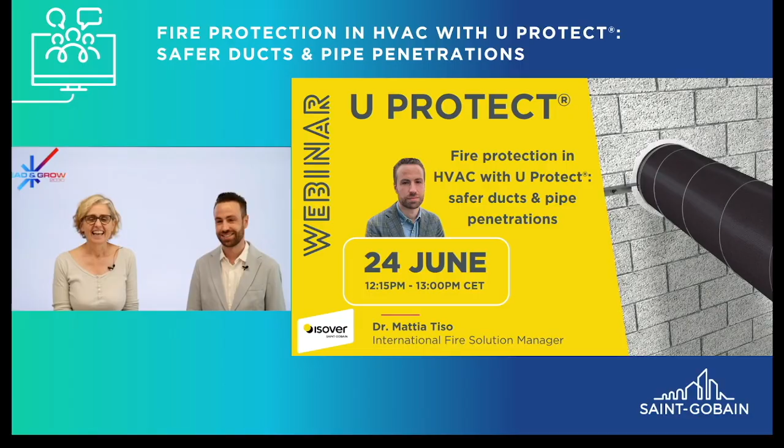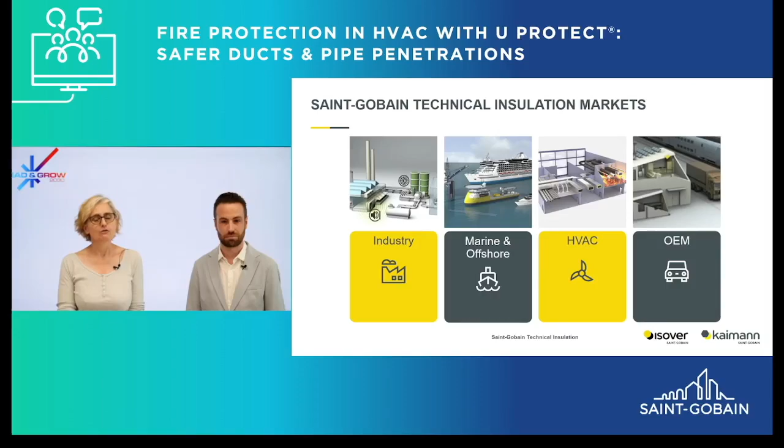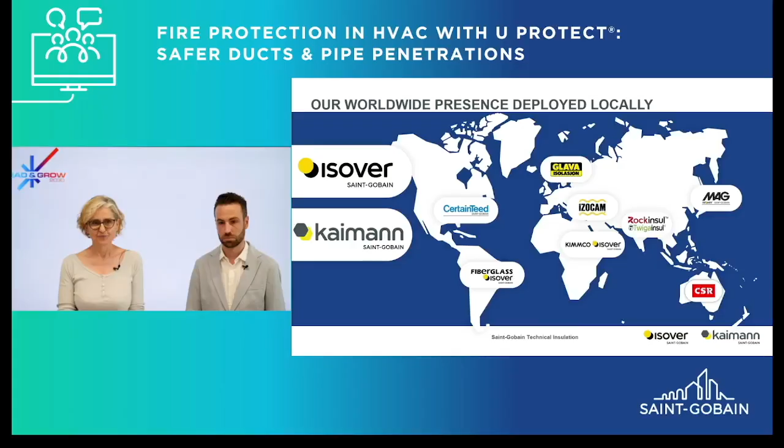But before we start, I would like to introduce Saint-Gobain Technical Insulation. We operate across 4 key technical markets: industry, marine and offshore, HVAC, and OEM. We have a strong presence worldwide with our 2 international brands, Isover and Kaimann, and we also have a lot of strong local brands, local teams and production sites in many regions over the world. We are experts in the area of insulation material, and we cover a lot of different types of material: glass wool, stone wool, Ultimate, our lightweight stone wool, and also elastomeric foams. So it allows us to address diverse and very demanding applications.

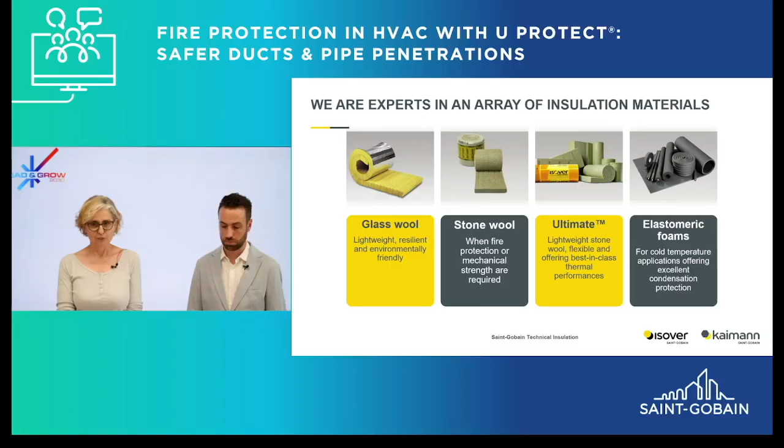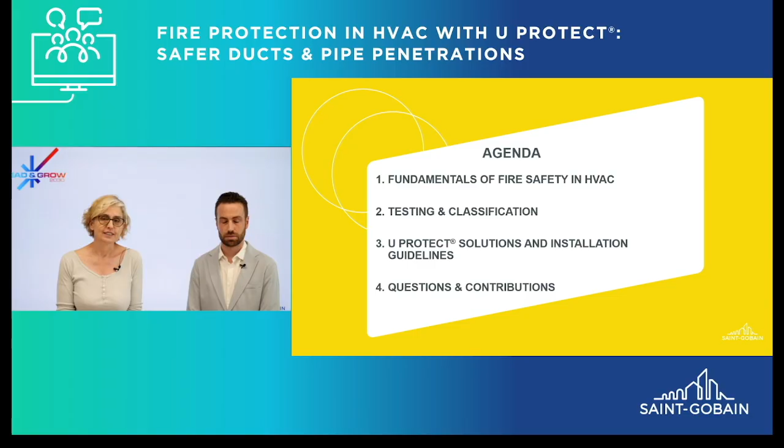So let's move to the topic of the day. This is the agenda. We will conduct this webinar in 4 parts. We will first start with the fundamentals of fire safety in HVAC. Then we will look at testing and classification. And after that, we will reveal our U Protect solutions and also the installation guidelines that we provide. And at the end, we will be happy to get your questions and take time to answer them.

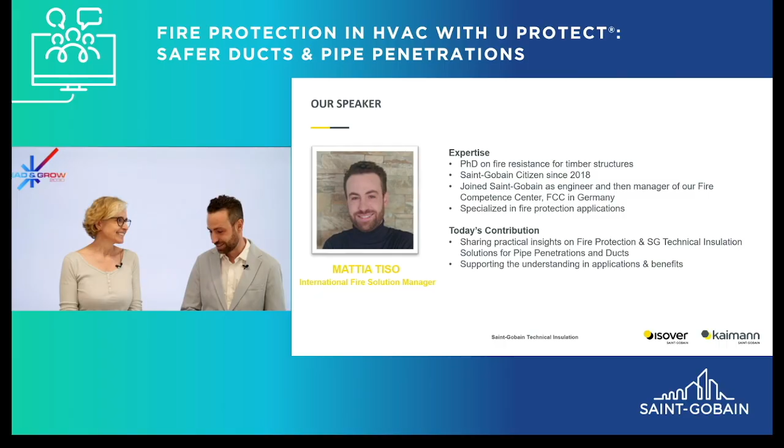So I would start with a kind of generic or simple question, at least. When we think about fire safety in buildings, we would often think about walls, doors, evacuation routes. So why do we also need to focus and talk about HVAC ducts and pipes?

You are correct. For fire safety purposes, buildings are divided into compartments by fire-rated walls and floors. Whenever we have pipes or ducts running through these fire-rated divisions, they create a perfect path for fire and smoke. This is why fire-rated ducts and pipes are needed. For that purpose, the insulation not only provides thermal and acoustic performance, but also minimizes the risk of fire spreading while maintaining the integrity of the walls, the floors, and all these systems together.

Okay, so in fact, these ducts and pipes can become a path for fire from one room to another. And then, of course, it's super important to focus on them. All right, so can you describe how fire resistance is evaluated on a ventilation duct?

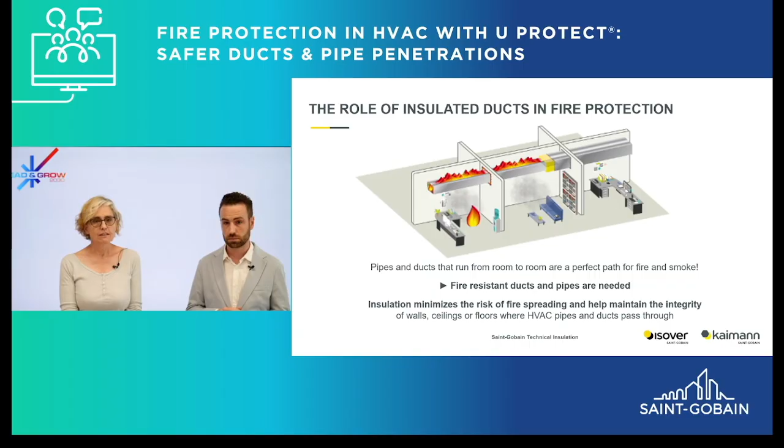Of course. Fire resistance of ventilation ducts is tested according to the European standard EN 1366 Part 1. And there are 4 possible testing scenarios. The more obvious one is that the duct can be tested either in horizontal or vertical position. Then there are 2 different fire scenarios.

The first one is when the fire is only outside of the duct, with the duct under pressure. This is also called the type A scenario. The second one is where we have an aperture into the duct. The duct is subjected to a constant airflow extraction, and this is also called the type B scenario. All right, so we need to test based on the standard, and we need to follow the different scenarios that you just explained.

All right, and how do you evaluate the fire performance? Is there any criteria for that? Yes, of course. In the same standard, the performance requirements are identified, which are insulation—meaning the temperature on the unexposed side of the duct shall not rise above 140 Celsius, and this is typically achieved with the right insulation product—and also integrity, meaning there is no passage of smoke or fire on the unexposed side of the duct, which is achieved with the right metal duct. So for ventilation ducts, we understand that the final performance depends on both the duct and the insulation.

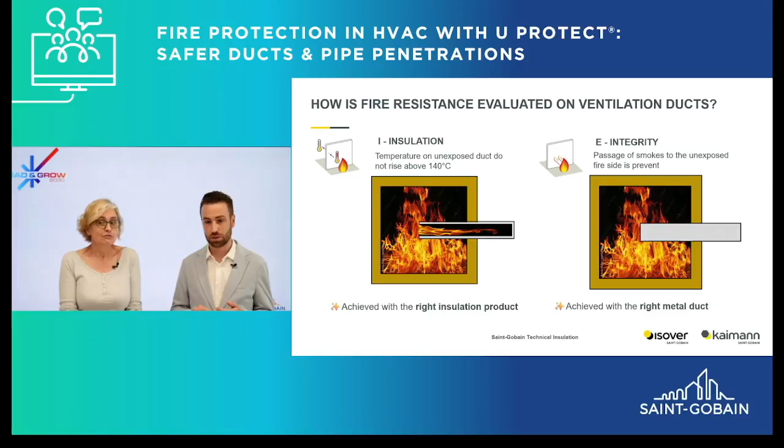Yes, exactly right. So let's move to another specific case: smoke extraction ducts. Is there any difference in terms of this smoke extraction duct? Well, yes, of course. There are also different solutions, and they are tested with a different standard. It's also part of the EN 1366 family, but it's Part 8, multi-compartment smoke extraction duct.

In this test, we combine the condition of a type A test, where the duct is under pressure, and the type B test, where there is an aperture and an airflow. So this is called the type C test, and it is indeed a very tough test.

The test can be performed with three different pressure levels, either in cold or in fire conditions. Why? Because the performance for this type of construction is about the cross-section.

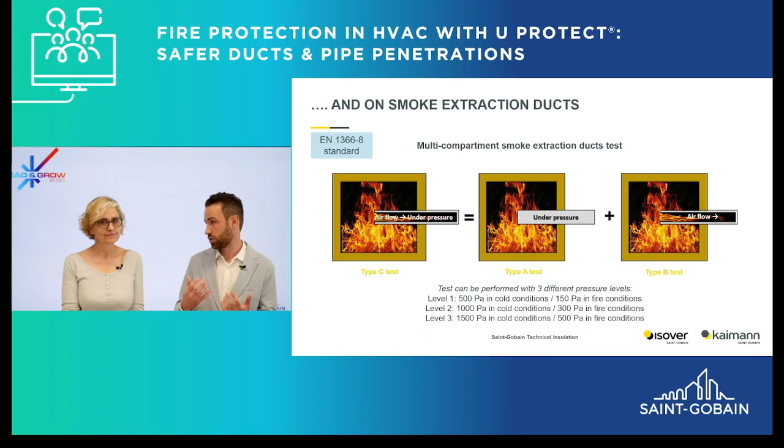For this type of solution, we need to ensure that the cross-section is not deforming, to allow the smoke to evacuate. The performance criteria is that the average cross-section shall not decrease by more than 10%.

This is achieved with the right metal duct. So if the duct deforms too much, basically the smoke extraction becomes less effective. Exactly, that's the point.

Once the tests are done, the results are translated into classification. I must say that the classification can look a little bit difficult to understand at first. So can you help us decode them? Let's try to understand it together.

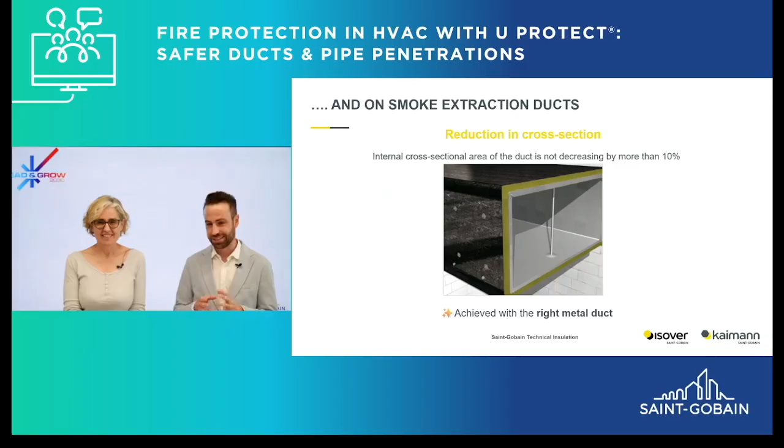So in the case of a ventilation duct, it's indicated if the integrity is fulfilled with an E. With I, it means that the insulation performance has been fulfilled.

Then there is information regarding the tested duct orientation. ho means it has been tested only horizontal, ve only vertical, and ho ve in both cases.

Then there is an indication about the fire scenario which has been tested. I to O means that the duct has been tested only for fire outside, so type A.

O to I means that the duct has been tested only for fire inside, so type B. And when we have I to O with a double arrow, it means that both scenarios have been tested.

Then there is an indication for a fire class expressed in minutes, which goes from 30 to 120. And an S indicates that the smoke leakage criteria has been fulfilled.

And for smoke extraction ducts, does it include any additional information? Yes, of course. For smoke extraction duct, the classification can look as follows.

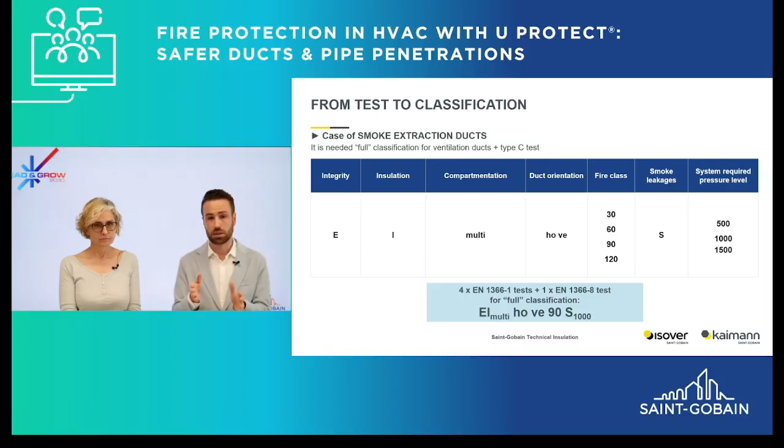And then at the end, there is an indication of which pressure level the system has been tested: 500 for level 1, 1000 for level 2, and 1500 for level 3.

For a full classification, as we show there, four tests according to part 1 for ventilation duct are needed to be fulfilled, plus the type C test on part 8.

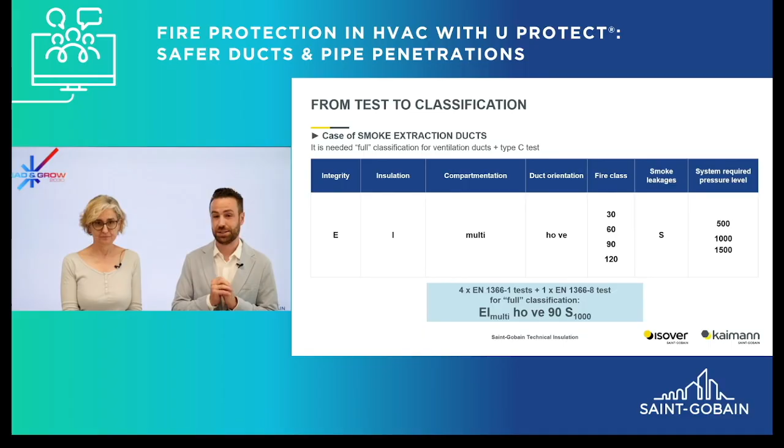Which is again part of the 1366 family, but this is the part 3 standard.

In that case, the standard allows testing a pipe in a different configuration. The most obvious is that the pipe can be tested in horizontal or vertical position. And then there are different types of fire scenarios.

So we can divide them into closed systems. The closed system is where we have, for example, the pipe capped on both sides, fire and unexposed sides, or also fire side but not unexposed side.

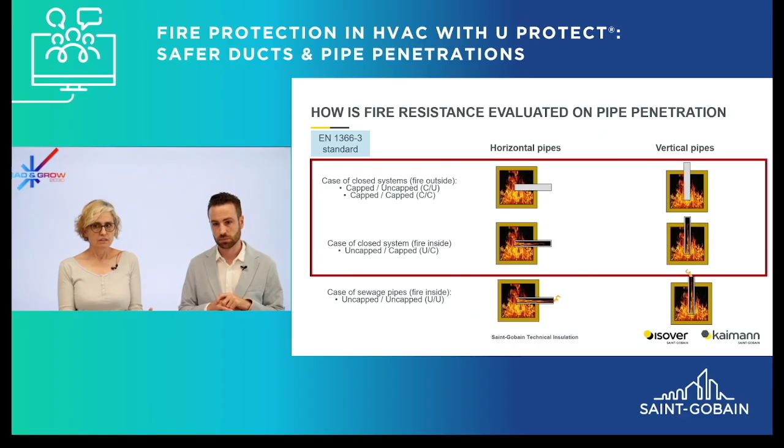And how do you test them, in fact, in real world, real life, I would say? It depends on what the end use case and the pipe material are.

For example, if we have a steel pipe for drinking water, we can test the pipe capped-capped, uncapped-uncapped, or uncapped-capped, so fire inside or fire outside, closed or open scenario. Multiple options. But for plastic small tubes in a closed system, only capped-capped or uncapped-capped are allowed. These are suggestions from the European standard, but any national prescription prevails over it. So we need to consider both the pipe material and the end use before choosing the right test scenario.

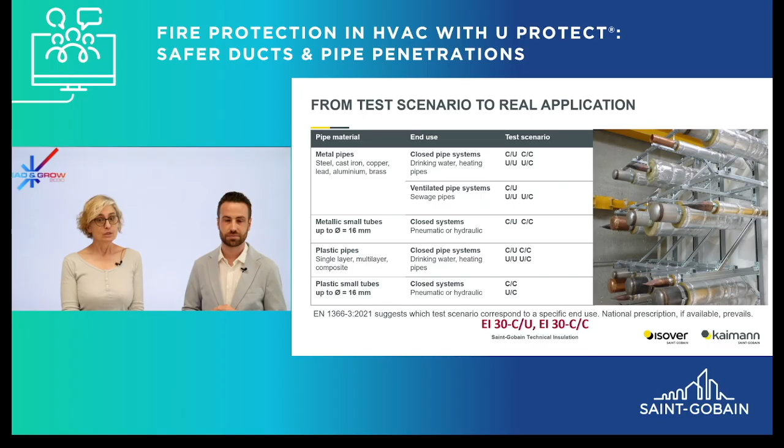So now we have understood how ducts and pipe penetrations are tested and classified. I propose we move to our U-Protect solutions.

For U-Protect we have a wide range of products. For ventilation ducts, for circular duct we have a vent section or wire net mat, or for rectangular duct we have slabs, which come together with a series of accessories, for example tape, glue, intumescent paint, fire screws, or welding pins.

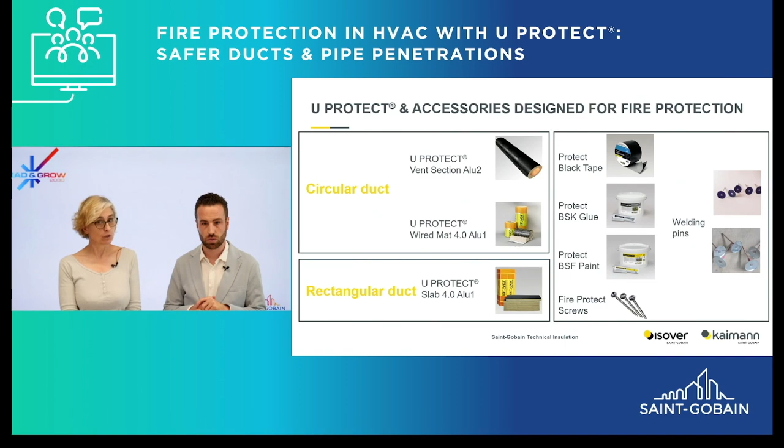Do we also have U-Protect solutions available for pipes? Of course. For pipe we have a range of pipe sections which are aluminum faced, available in thickness from 20 to 120 millimeters, for diameters from 15 to 273 millimeters.

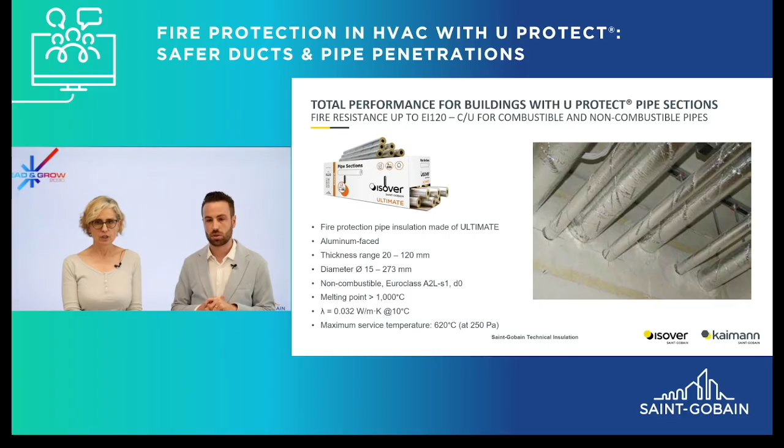Let's detail some different solutions available for ventilation ducts. For a ventilation duct we have a wide range of solutions that go from 30 to 120 minutes, and depending on the fire rate you need, there is a different thickness. For rectangular duct, if you need 30 minutes we need 50 millimeters, or for 120 minutes it requires a 90 millimeter duct.

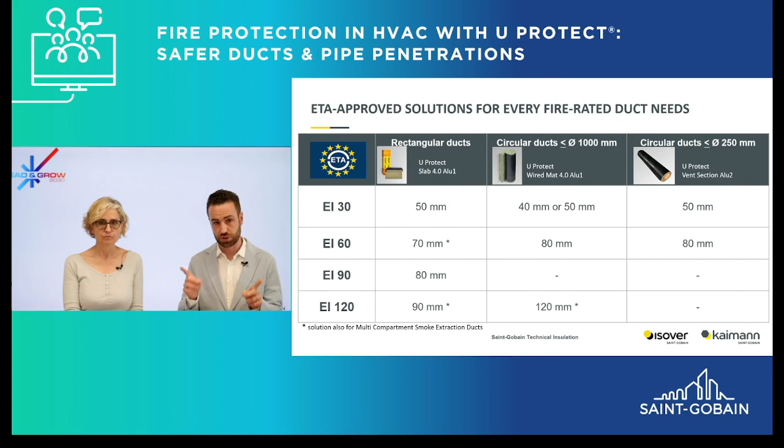Are these solutions tested? Yes, they are tested, and we have full certification for all of the described solutions, from 30 to 120 minutes for rectangular and circular duct, and for some solutions, for example 120 minute circular or rectangular, we also have solutions for smoke extraction ducts.

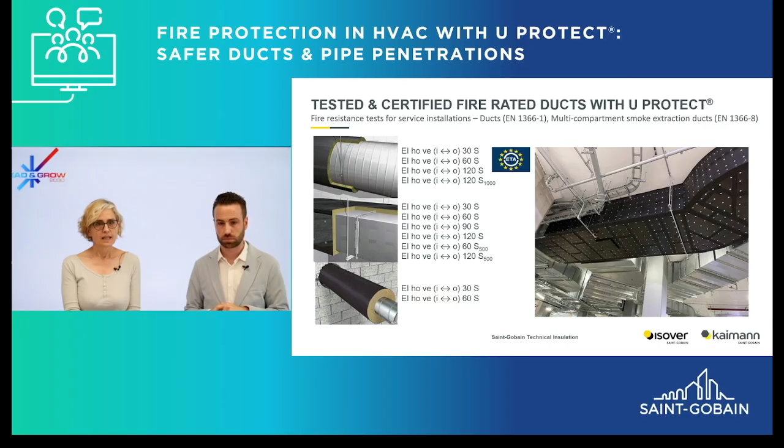And what about pipe penetration? For pipe penetration we also have a multiple range of solutions. For metallic pipe they go from 30 to 120 minutes, and can be either capped-uncapped or capped-capped. For plastic pipe we have a range that goes from 60 to 120 minutes, also in the same fire scenarios.

This can be quite a big range of solutions, so to help designers choose the right product for the right application, we have a Fire Planner available. So Fire Planner is an application we propose online? Absolutely, online — we'll show later where to find it. Anybody can connect, no special credentials needed. So it's a free tool that we propose.

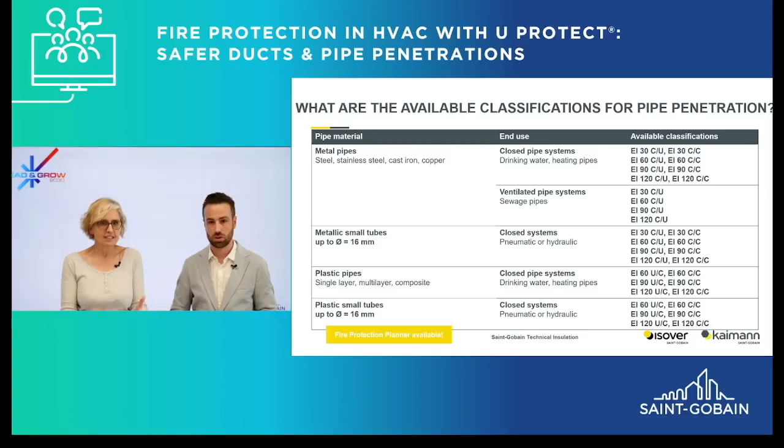In addition to the Fire Planner, do we have other resources to help navigate these classifications? Yes, we have full documentation available, a wide range of documentation for ventilation duct, general assessment for rectangular and circular duct, covering from EI30 to 120 fire resistance, and also allowing special applications like 2 or 3 side insulation. We have classification reports, EXAPs, and our ETAs, which cover ventilation and smoke extraction ducts up to 120 minutes.

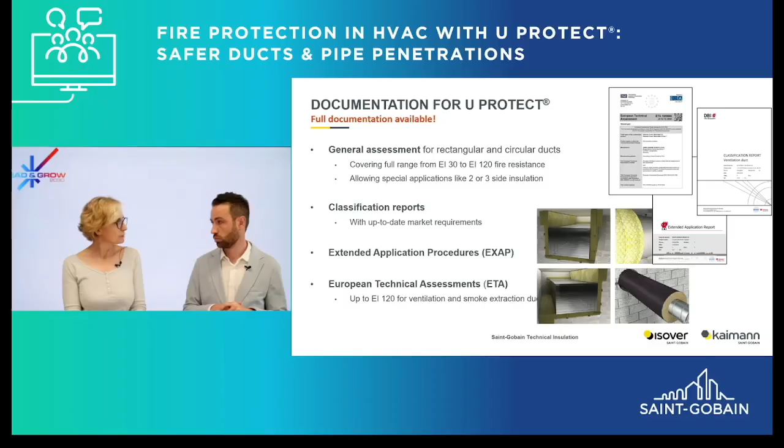And do we have that for pipe penetration too? Of course. For pipe penetration we have two classification reports according to EN 13501 part 2, one dedicated to non-combustible pipes and the other to combustible pipes. There you can find a general description of the system and the direct field of application for the solution.

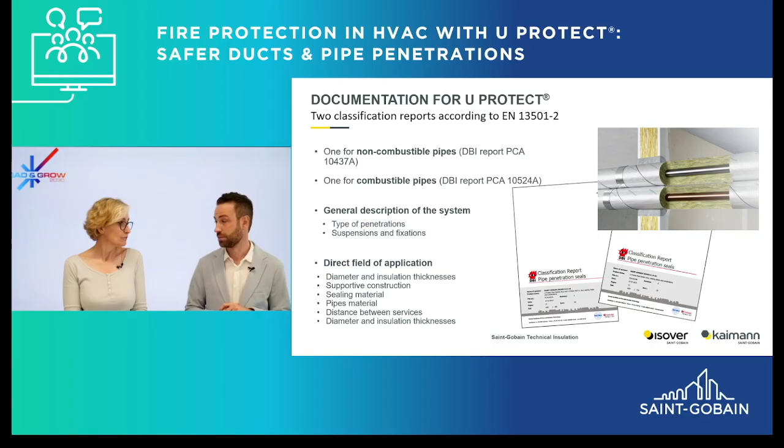Fire resistance, as you mentioned from the beginning, is not only a matter of product but really a matter of a system. What does that mean in practice? That's a good point — when we talk about fire resistance, it's not only about the right insulation product and the right thickness, but the whole system shall be realized as described in the documentation.

For example, the duct flanges shall have a certain dimension, the clamps shall respect a certain distance, gaskets must be applied if requested, and in penetration details, any particular glue or intumescent paint we offer must be installed, L profiles where needed, and the pin pattern shall be respected. So all the details are important. What you call details, in fact, are not small details. No.

A very key point, in fact. Let's try to make it very practical, even if it's online. What would be the key steps when designing, for example, a fire-rated rectangular duct with U-Protect slabs?

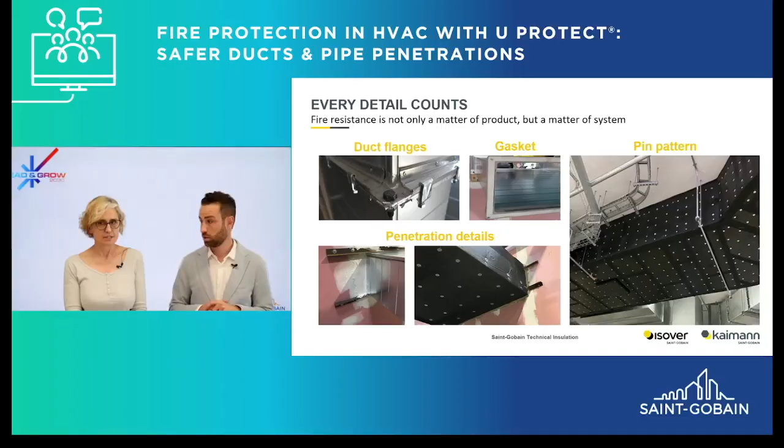If we take a rectangular duct, there are 4 steps to follow. First is the characterization of the duct section. Tightness class shall be respected. Stiffeners, if present, shall be inserted. Flanges and clamps shall have the right dimension, the right distance, and the same for the suspension with the right distance.

Then comes the choice of the insulation thickness, which depends on the targeted fire class. The length of the pins and screws goes together with insulation thickness. As a third step, we must pay attention to the penetration details: filling the residual gap with the right materials, sealing with BSK glue, and also BSF paint if needed. And then reinforcement with L profile.

The 4th step is the installation layout. It shall be respected because it can be different between vertical and horizontal duct. The pattern of the pin and the fire screws shall be respected, and at the end, the joint can be covered with black tape.

So here we really see how structured it is, and step by step you can achieve the performance by following these steps.

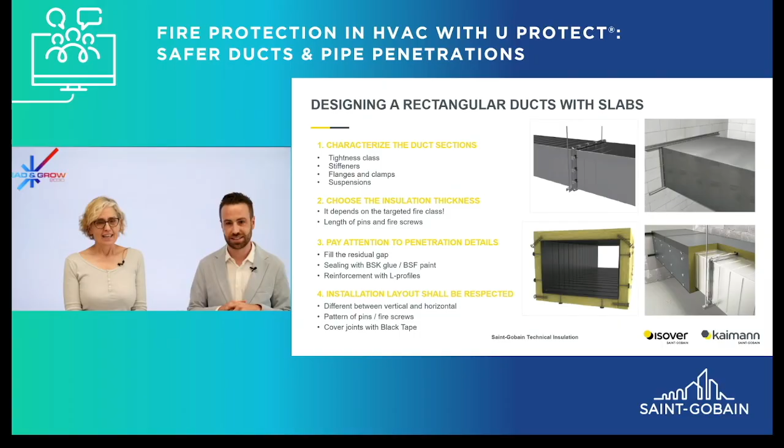Is there any change if we move to circular ducts? There are changes, but again we can summarize in 4 steps. First, the characterization of the duct section - about the tightness class. In this case, the dimension of the connection and the prescription shall be respected. Gasket, if present, shall be inserted, and the distance on the suspension shall be respected.

The second step is again the choice of the insulation thickness, which depends on the targeted fire class. As a third step, we must also pay attention to the penetration details, filling the residual gap with the right materials. Then comes the sealing with BSK glue or also BSF paint if needed, and any reinforcement if needed shall be installed. As a fourth step, installation layout shall be respected, so the wired mat shall be cut to the right length, and the stitching method shall follow our prescription.

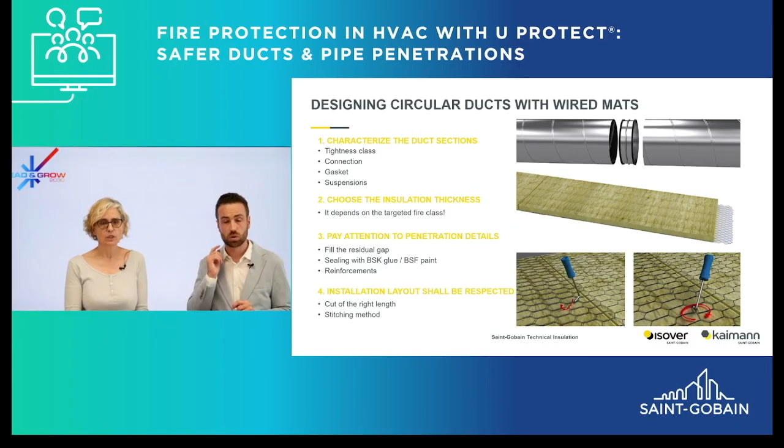Thank you, Mattia. So now what I propose is that we have a look at a video, as a good way to show our audience the different videos available on our YouTube channel. It's more for circular ducts.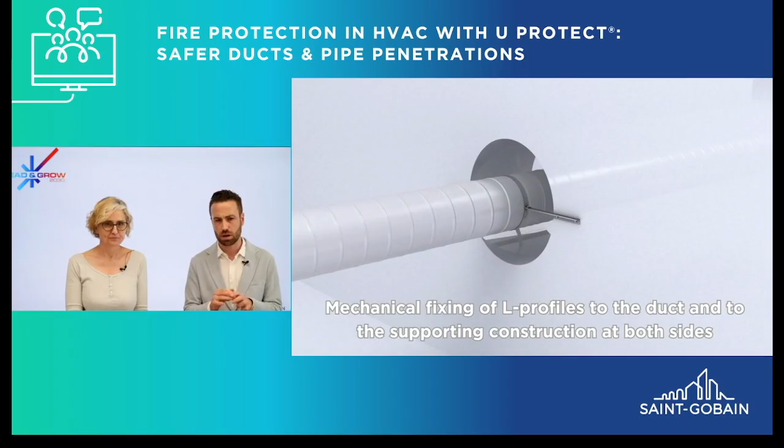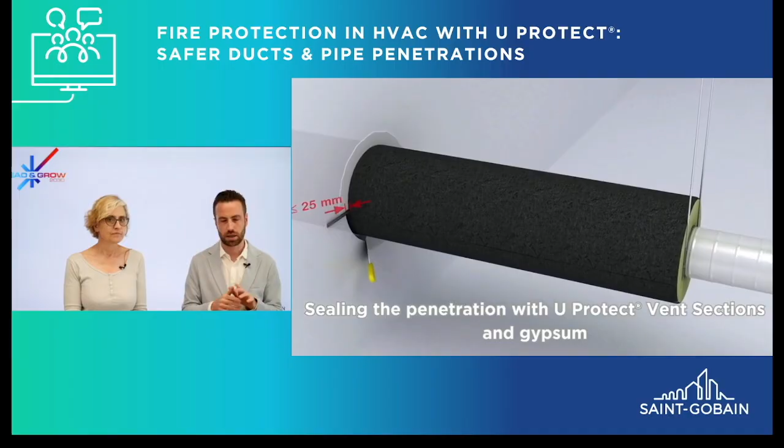We have a video with a circular duct, particularly with our vent section solution, specially designed for small circular duct diameters where the WireNet mat is not so comfortable to install. As you can see, the penetration details are installed with reinforcement, then a vent section is wrapped around the duct. It is secured with an integrated tape lock, then put into the penetration. The sealing in this case comes with mortar or gypsum.

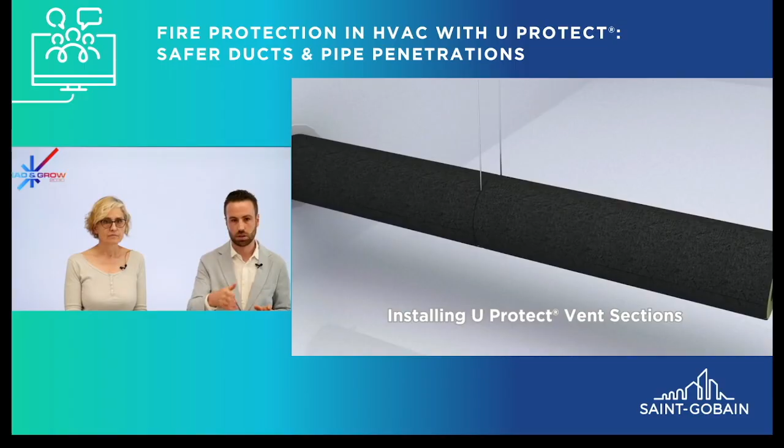You can see how fast it is to install the full duct length with this vent section, because you just wrap it around and seal it with tape, and then at the end you add some wire.

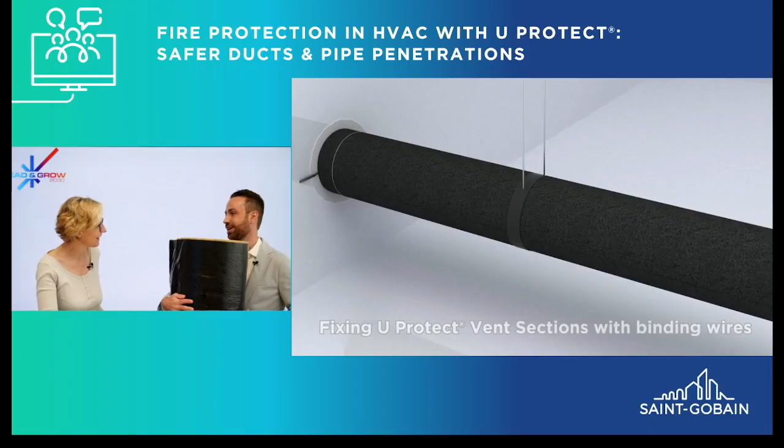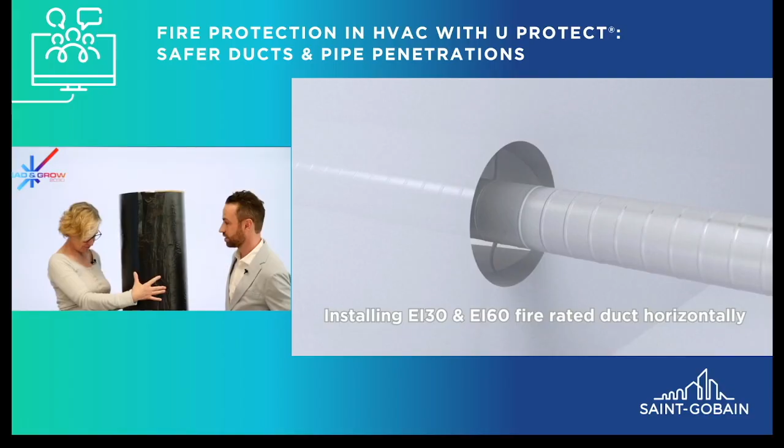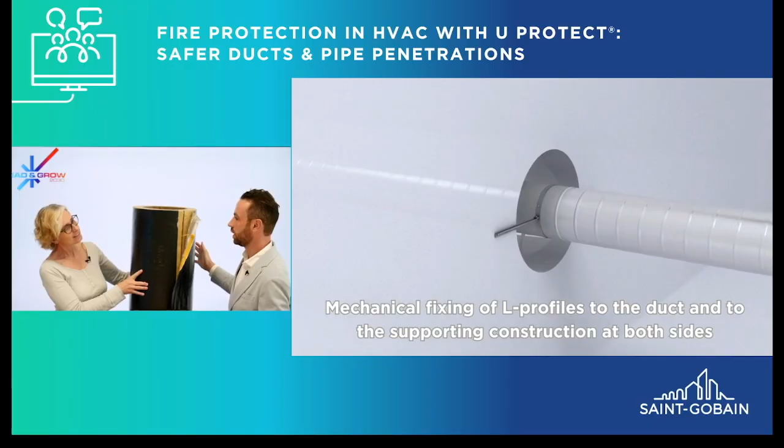To show better, I also brought a sample - a little one, but of course it's quite big in reality, though still light. Let me test it for you. You can see you can easily open it, and it has the integrated tape lock. The installation is very, very quick and easy.

So these are the different steps. On the same principle, also for circular duct with vent section, the first step is the characterization of the duct section, same principle as circular duct with WireNet mat. The choice of the insulation thickness is also related to the fire class. Again, pay attention to the penetration details, and the installation, as just shown, is just wrapping, closing, and securing with steel wire - nothing less, nothing more.

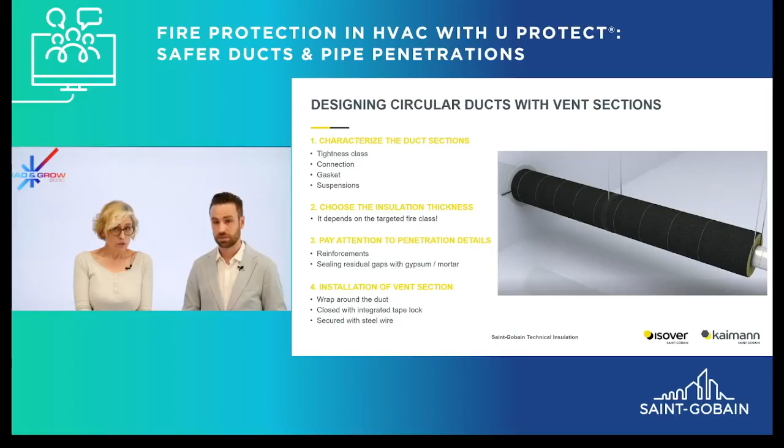Very clear, thank you. So depending on the duct shape, the diameter, the fire class, and also the installation conditions, the right U-Protect solution may be different. There are several options, and we cover quite a lot. So let's step back a little and look at the overall value of the U-Protect solutions.

So U-Protect is not only about fire safety, it also provides excellent thermal insulation, optimal acoustic performance, easy and fast installation as we just saw with the vent section, and a lightness that you felt. It also ensures optimized logistics, because on our package there is quite a lot of square meters. The aesthetics is guaranteed by the black aluminum foils, and all the products are EUCEB certified for biosolubility.

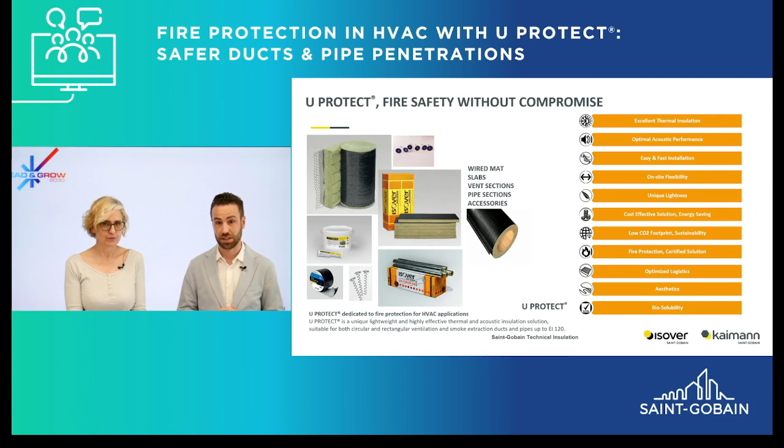All right, so of course all this is for our customers. So what does it mean concretely for the HVAC professionals? With U-Protect, the professional can turn fire protection into a competitive advantage, because there is one system for maximum versatility, and it is less complex, faster to specify. There is tested performance that you can trust. We have seen the large library of documents that are available, which gives confidence to designers, installers, and authorities.

Save time on site, fast installation, fewer components, which at the end means reduced costs. And again, reduce risk and ensure compliance through all our certifications. But also very important, continuous technical support. There are tools for the selection, but they can always count on our support whenever needed. Yes, it's always important to be able to talk to somebody that can also show how to do, not only talk.

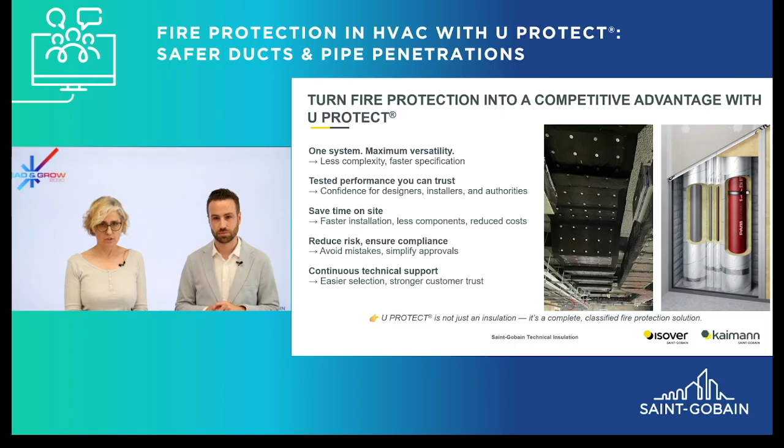So if you had to summarize the key messages of our webinar today in 1 minute, what would you say? I would say that with U-Protect, we have a tested and certified solution up to 120 minutes. It is light and fast to install, and customers can count on our technical support, trainings, and information materials.

All right, thank you very much. Thank you very much for all this detailed explanation and proof also.

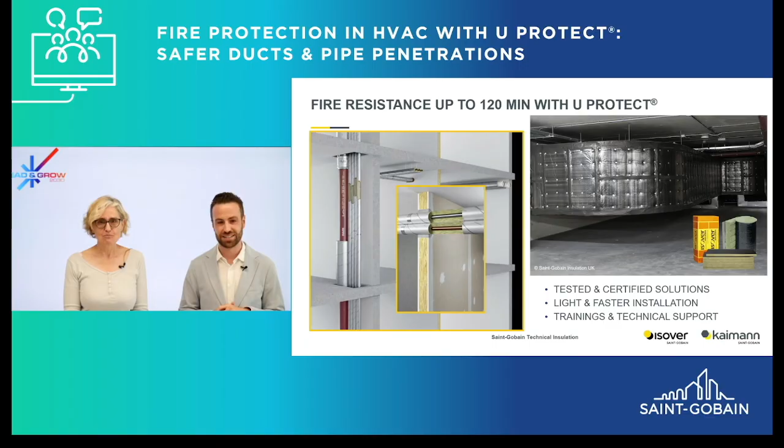I have people who say thank you for the presentation. Thank you. Welcome.

Is installer training recommended? Yes, absolutely. We organize installation trainings in different countries. I encourage people from the audience to contact the local teams to get this type of training. To get the contact of the teams, they can also go on the website and get the contacts. So training is more than recommended. Yes, especially hands-on trainings, they are very helpful.

Another question maybe? Yes. What makes U-Protect different from traditional stone wool solutions? Well, on top of lightness and thermal and acoustic performance, easy installation is key. So, for example, for rectangular duct with U-Protect, we don't need to glue the joint as all traditional stone wool solutions need to do. Yeah, there are some specificities that make them completely different.

Okay, so maybe just before ending this webinar, we would like to also remind that we have a lot of documentation available online, and you can also contact us. So yes, we have a brochure, installation guidelines, technical data sheet, all available on our international website.